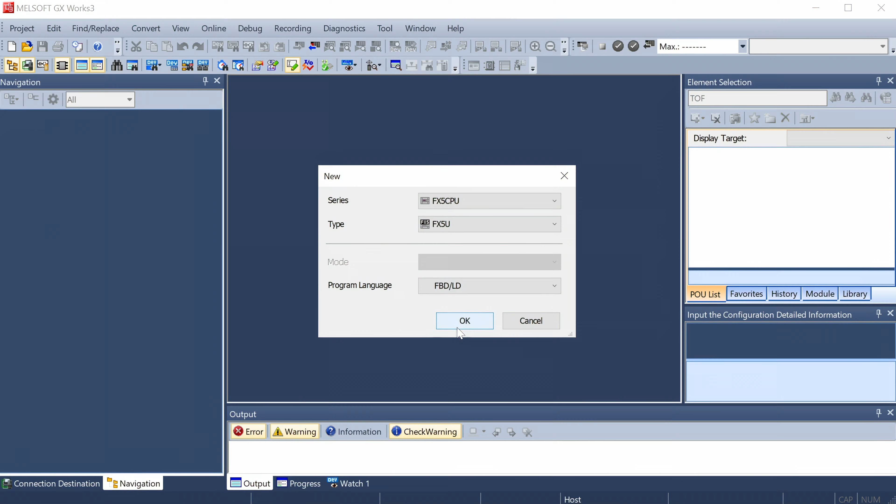First, open the MELSOFT GX Works3 software and create a new project. Then select the series and type of PLC you're using, including the programming language you want to use. After that, open Module Configuration. Then select the CPU, right-click and click Change CPU Model Name. Then select the CPU device you're using and click OK.

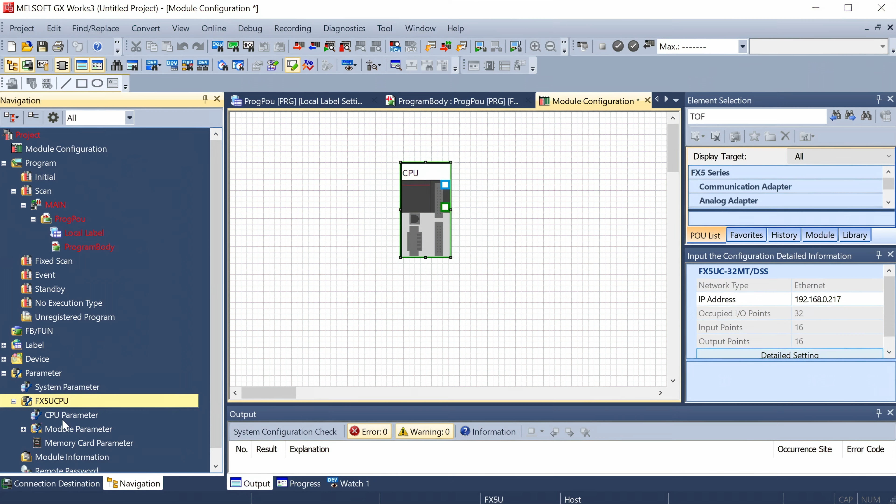Now expand the Input the Configuration Detailed Information tab to the side and enter the IP address of your device. Now open Parameter in the navigation sidebar. Open your PLC and select CPU parameter, then click Yes. Now select Operation-related settings and enable Remote Reset settings. Then click Apply. Now expand Label in the nav sidebar and click to open the global label settings.

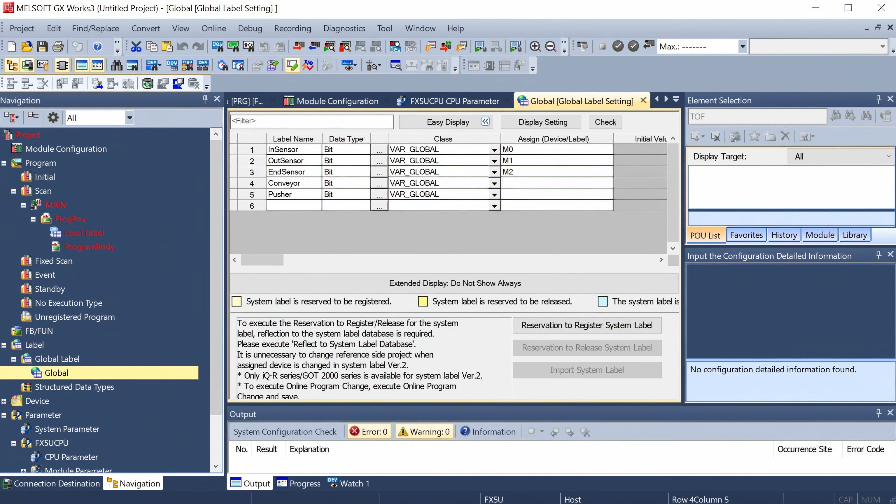We want to add 5 labels for the in sensor of type bit, the out sensor of type bit, the end sensor of type bit, the conveyor of type bit, and the pusher of type bit. Now click the Show Details button above and enter the addresses. We'll use the first 5 bits of the internal relay area, which has address M0 up to M4. Now we're ready to start creating the control logic.

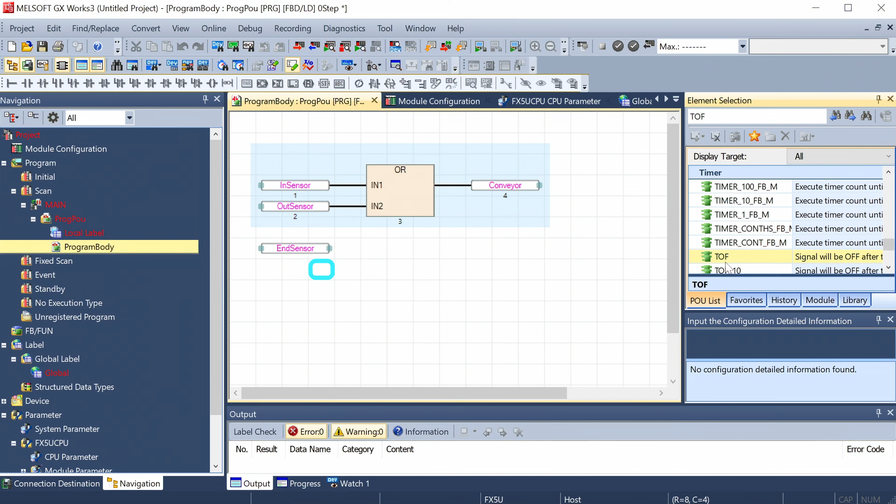Open the main program body and add a variable for the in sensor and then another variable for the out sensor. We want the conveyor motor to be on when either the in sensor or out sensor is blocked. So add an OR gate and a variable for the conveyor. Following that, add a variable for the end sensor and then add an off delay timer block. We want to activate the pusher when the end sensor is blocked, then deactivate the pusher after a 1-second delay. The control logic is done now.

Click Convert, then OK to rebuild the program. Now click on Line and then Write to PLC to transfer the data to the PLC. Click Select All, then click Execute, and then Yes to all. Now we want to reset and restart the CPU module, so click on Line, then Remote Operation and change the CPU operation to reset, then click Execute and Yes. Now change the operation to Run and click Execute and Yes again.

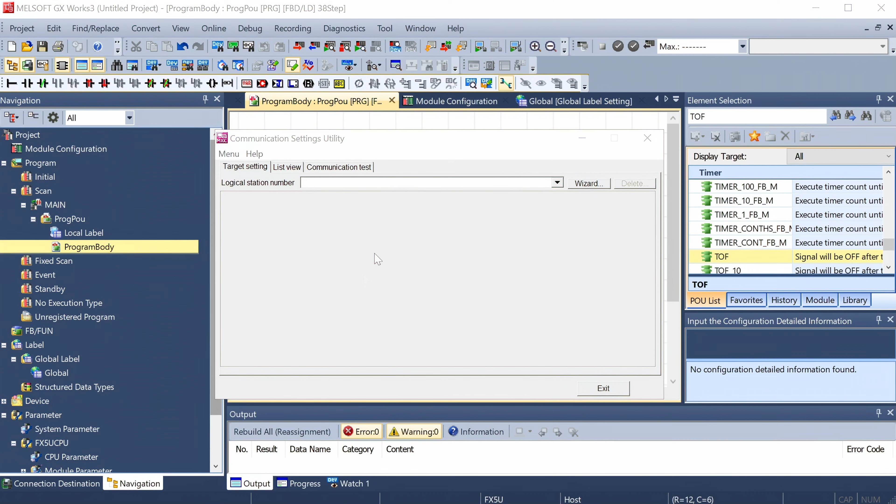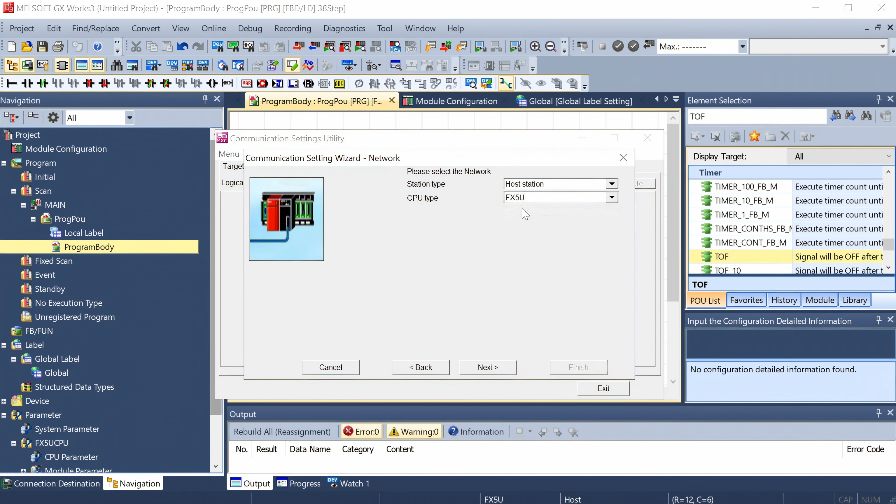Now start the Communication Settings utility from MELSOFT. Then open the wizard and set the logical station number to 1. Click Next and set the personal computer side interface to Ethernet board. Then set the Connect module and click Next again. Now set the PLC side interface. Then either enter the host IP address of the PLC or find CPU on network to locate the CPU device on your local network and click Next. You can leave these properties, click Next again, and then Finish. Finally, I recommend testing your communication. That completes the setup in GX Works.

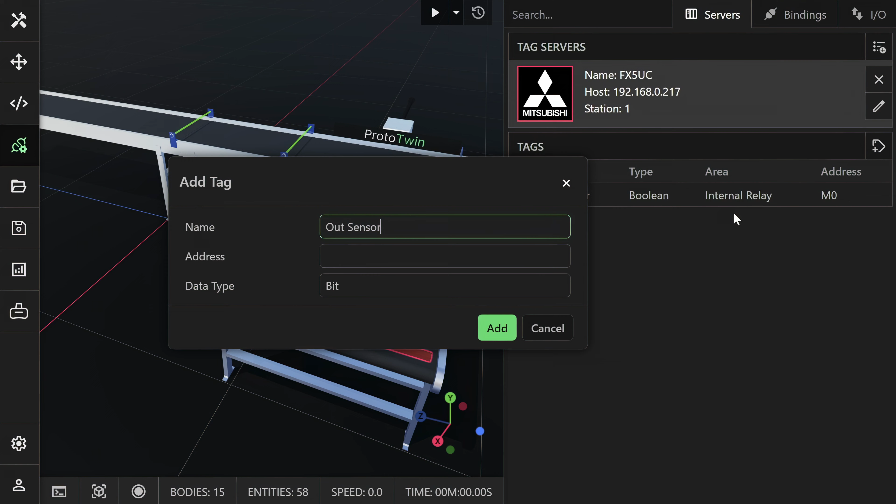Now launch ProtoTwin Connect and open the model for the pallet layer former. Open the I/O browser and add a tag server for the PLC device. Select the Mitsubishi MELSEC protocol. Then enter a name, the host IP address. Leave the station number as 1 and set the scan rate to 10 milliseconds. Now click the Add button to manually add the tags. Enter the name, the address which we specified earlier in the video in the GX Works software, and leave the data type as bit for all the tags. You can click or Control-click to quickly create bindings for all the tags.

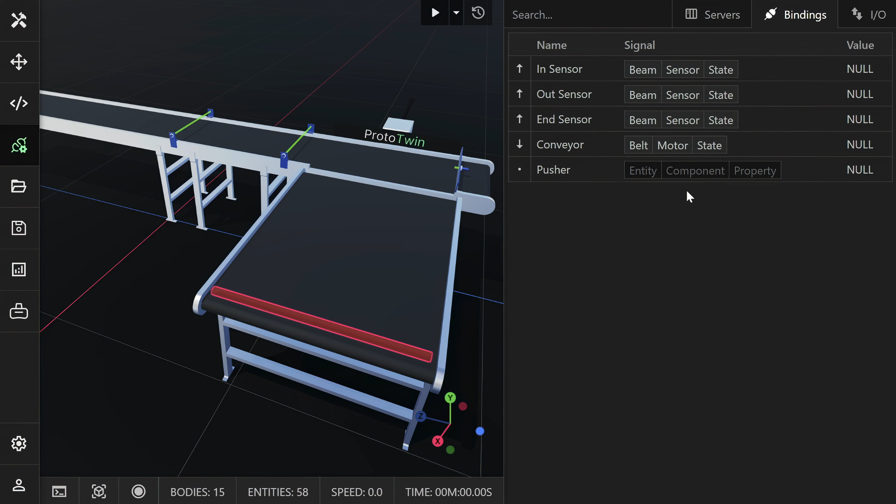Now swap to the Bindings tab and select the signals in the model, the entity, component, and property, to create bindings for each of the tags. The input tags are those which get written to the PLC, which then runs the program so the ProtoTwin Connect client can read the output tags. Okay, now we've set up all the bindings, we can run the simulation.

Notice how when the in sensor or out sensor gets blocked, the conveyor motor's state is set to true. And when the end sensor gets blocked, the pusher actuation controller state is set to true, then reset to false 1 second after the end sensor gets cleared. And the pallet layer former appears to be working correctly. And remember, it is being controlled entirely by our Mitsubishi PLC.

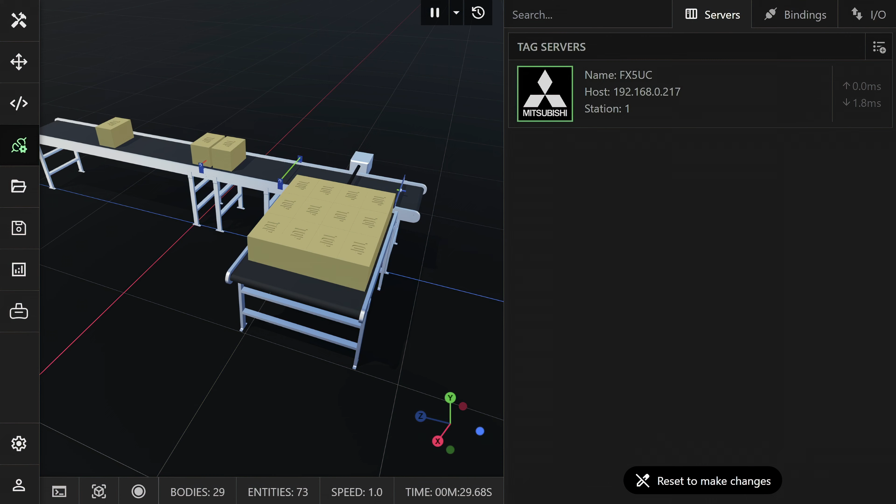There's just one last thing I want to show you. If you reopen the GX Works3 software, then click the Start Monitoring button in the toolbar at the top, you should see the current Boolean values of each of the tags. This might be useful for debugging your control logic. Remember, the ProtoTwin Connect client is writing the current model values of each signal to the input tags of the PLC they are bound to. Then the PLC executes the program, after which the ProtoTwin Connect client reads the output tags and writes the model values of the pusher and conveyor motor.

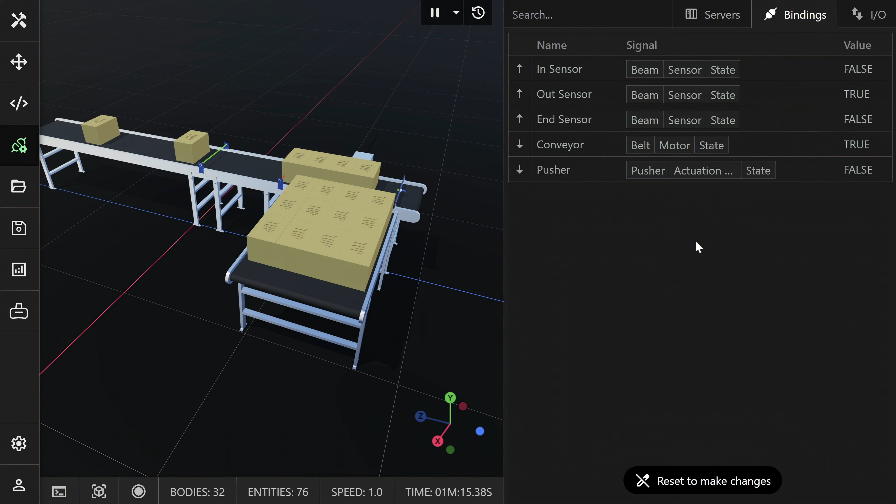And that completes this short tutorial. Now you should know how to connect ProtoTwin to Mitsubishi PLCs.